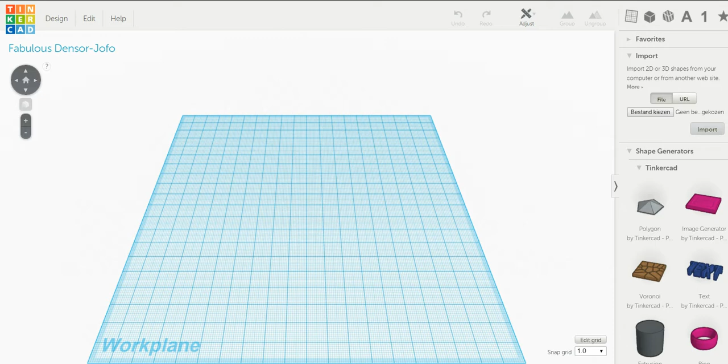So you just click on it and then the work plane opens, and on the right side you have all the geometrical options or the option to import a certain STL that you get from Thingiverse or someplace else. Anyway, the thing that I made was a buckle mount clip for a GoPro, and I found a certain STL that I already have here. Here it is, the flat mount.

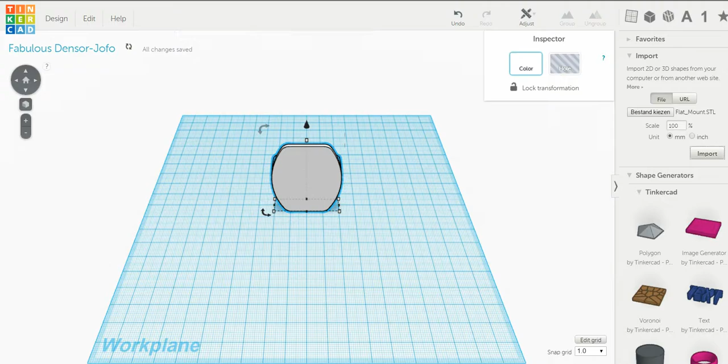I found it on Thingiverse, so we're gonna import it in millimeters because, as a European, we use millimeters, not inches. So this is exactly what I was looking for. Somebody else already kind of made it for me, and we're just gonna adjust it so that it is a right fit for my client.

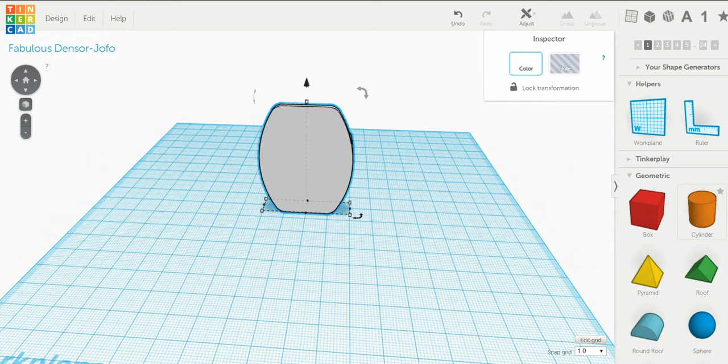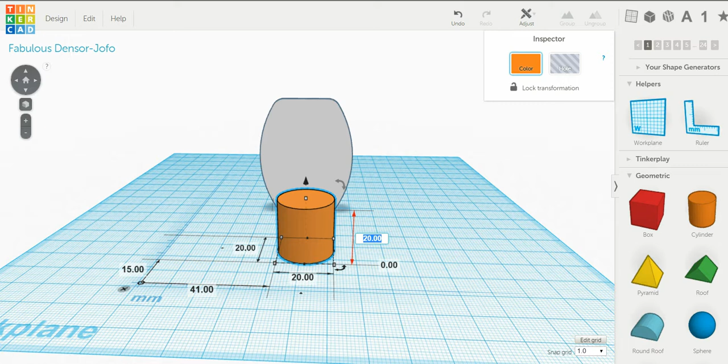So what I need here is to scroll down, and by clicking and dragging the cylinder onto the work plane, I can adjust it the way that I need it. So I'm gonna drag the ruler over here too, so you get all the exact measurements. The width is kind of good, the diameter, but it can be a little taller. Let's make it 35 millimeters.

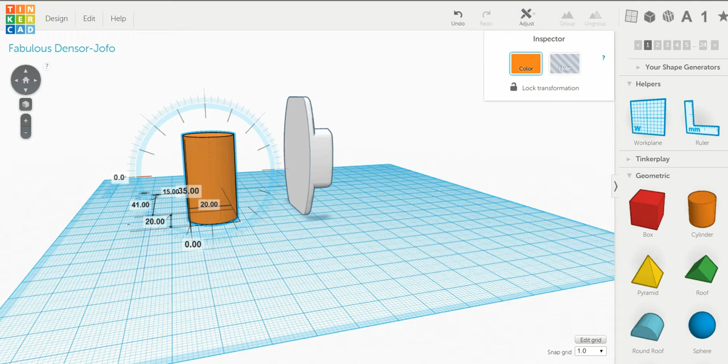There you go. Now if you switch the view, you can see these arrows here, and as soon as you touch them you get the degrees, the 360 degrees. So that means if I click on it, I can turn my object in any degree that I want to. So 90 degrees is perfect, and that is a way to attach this cylinder to this piece.

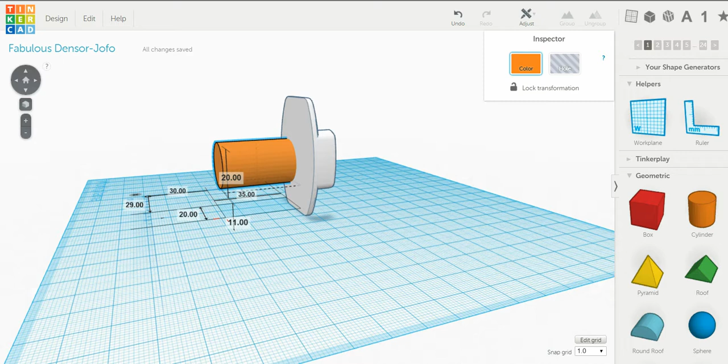Now I'm gonna try to move it a little bit here. That's perfect. There you go. You can see clearly that it went in, but it didn't go through. Now of course what is very important is that it needs to be right in the middle. So how do you do that?

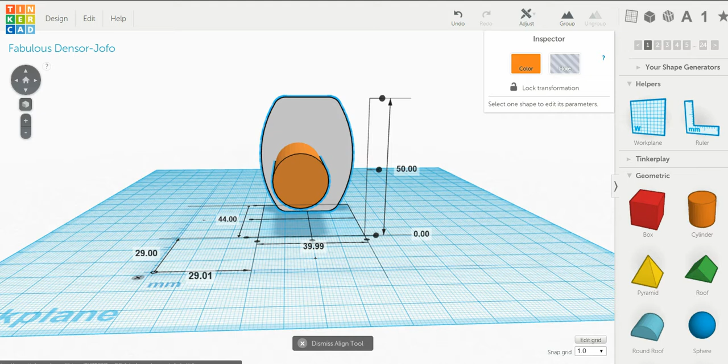You just take your left mouse button, click on it, and you draw a rectangle across your pieces. Then you go to adjust and you choose align, and what you can see now is that you get multiple options to align your object. So we have to align it here, it needs to be in the middle, but also it needs to be in the middle in height. So I've chosen both, and as you can see, that's a perfect fit.

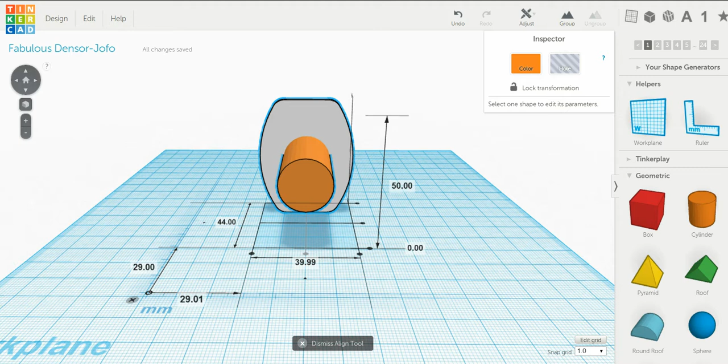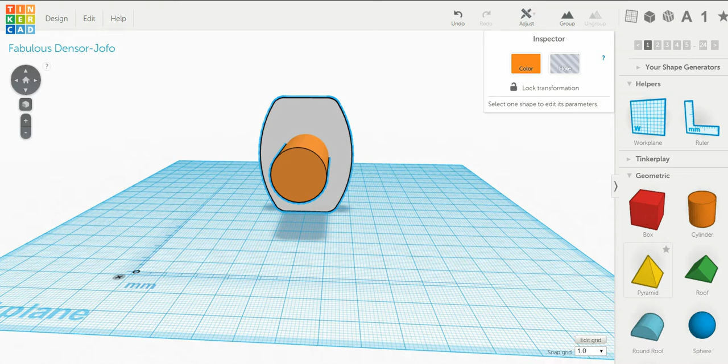We don't need the align tool anymore, so below you can click it away. There you go. So that's already a good start. Now, as requested, this thing needs to go on top of a tripod, so I need to create thread in here to screw it on. And something interesting with Tinkercad is that the community already has some stuff uploaded here, and because I'm familiar with Tinkercad, I know where to go and look for it.

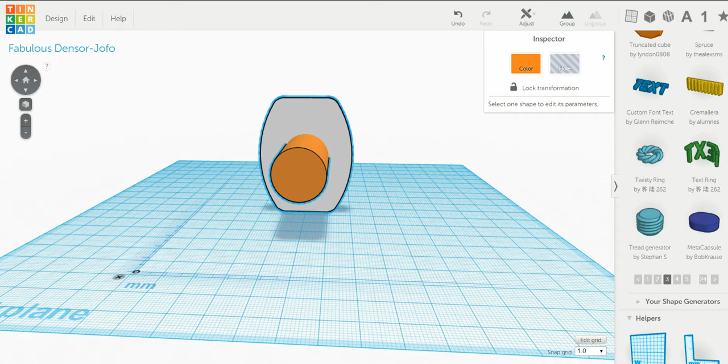On the third tab you have a thread generator designed by Stephan S. We thank him for that. So if you just drag that here, we can modify it the way we need it, as you do with everything on the work plane, but also here you can see all the options that just opened. So you can really make it just the way that you need it.

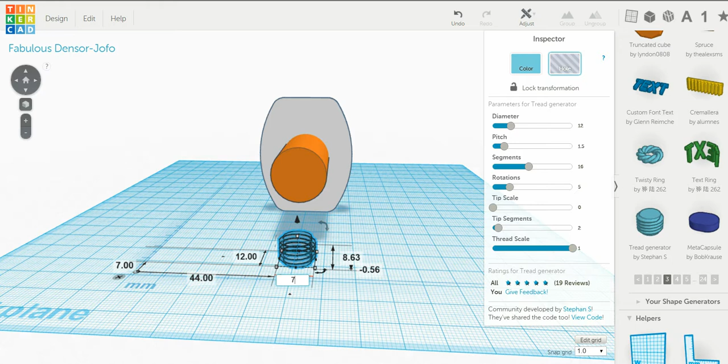Now first of all, it needs to be hollow. It doesn't need to be in a color because it's actually empty space that we're going to create, so I'm going to hollow it. And the 12 millimeters is too big. I measured the thread that it needs to be screwed on, and it measured 5 millimeters. But because of the experience I have, I know that you need to add 2. So I need exactly 7 millimeters, and in the other direction too. That is perfect. That is exactly what I need.

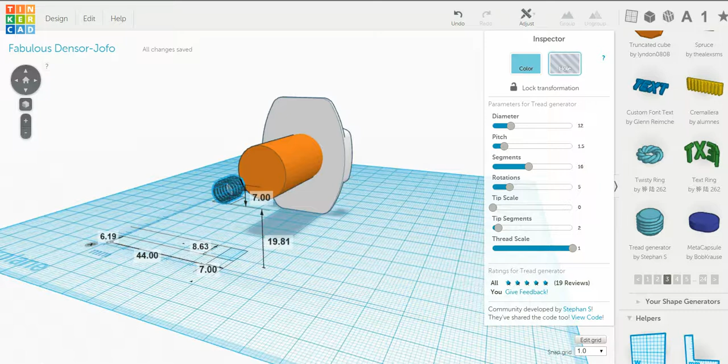So the only thing that I need to do now is lift it up, and then here we get the degrees again. As you can see, we're gonna put it at an angle of 90 degrees. It's in front of the cylinder, and we're just gonna push it in here, just leave the opening. That is perfect.

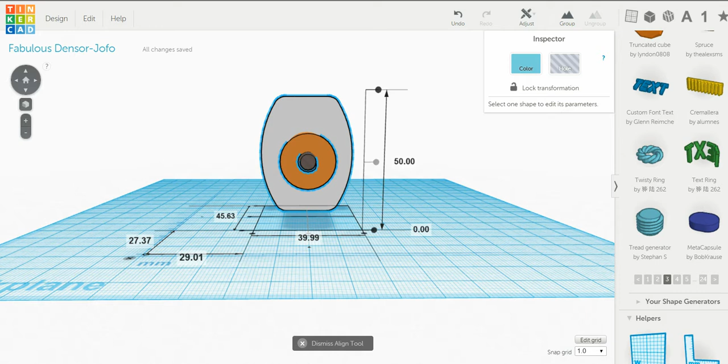Now the only thing that we need to do right now is again get that rectangle here, adjust, align. It needs to be in the middle. There you go. Look at it. This is exactly what I need. So you can dismiss the align tool below, and I have what I was looking for. So now we're gonna get a real big rectangle.

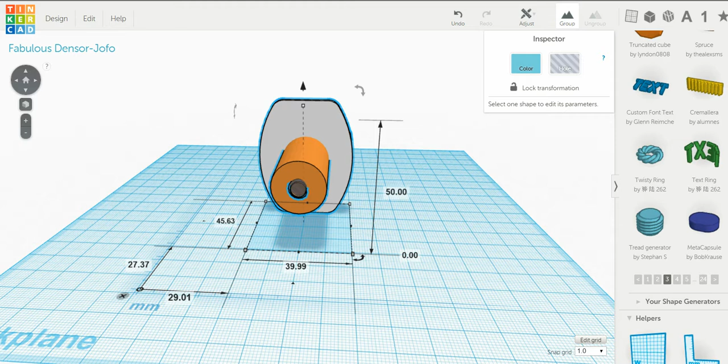So left mouse button, you just drag it over there, and you're gonna group everything. And as soon as that is done, you can see it's web-based, so Tinkercad always saves immediately what you've made. If you click away, look at it. So this is exactly what I need. The only thing I need to do is design, download for 3D printing.

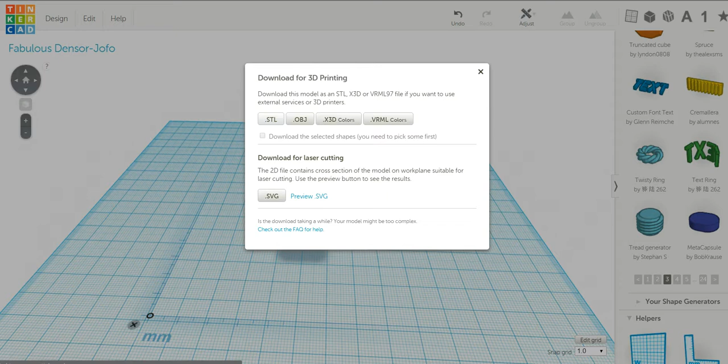Here's my STL. It's gonna be called the Fabulous Densor STL. Tinkercad always gives funny names, but you can rename that afterwards. And that is exactly what I need to run to my 3D printer and get this thing started.

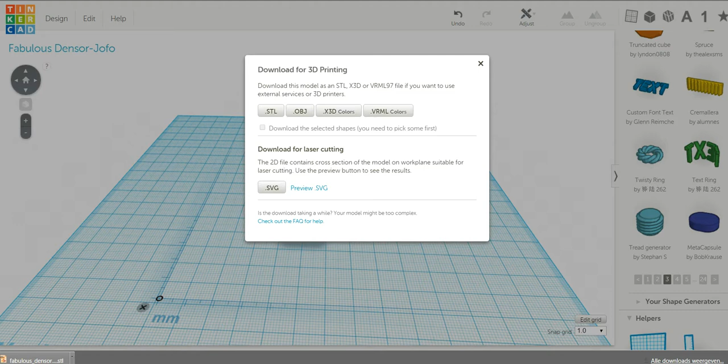So as you can see, Tinkercad is very easy to use. I'm not a graphic designer, it's just a matter of playing with it for a couple of minutes, and then you can create some awesome stuff.